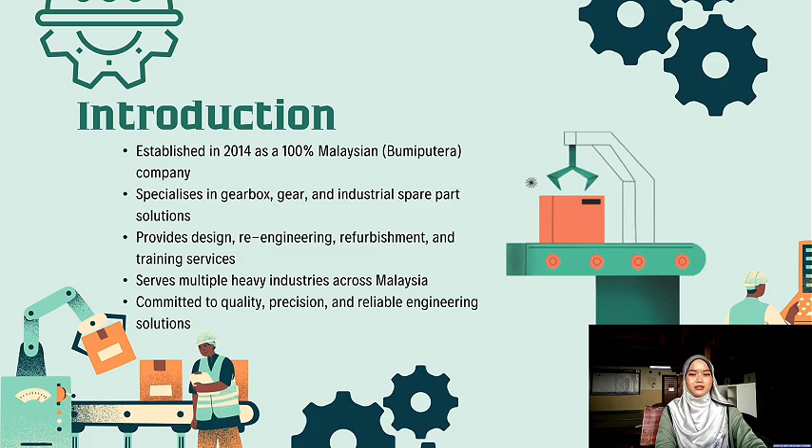Crescent Gear Solutions Sdn Bhd was established in 2014 as a 100% Malaysian Bumiputera-owned private limited company. The company specializes in the manufacturing and servicing of gearboxes, gears, and industrial spare parts. In addition, it provides design, re-engineering, refurbishment, and training services. Crescent Gear Solutions serves various heavy industries across Malaysia and is committed to delivering precise, high quality, and reliable engineering solutions guided by its philosophy of research, precise, and quality.

Company background: Crescent Gear Solutions Sdn Bhd is a private limited company that was incorporated on the 26th of May 2014. It is a 100% Malaysian, Bumiputera-owned company and is registered with the Ministry of Finance. The company operates from Klang, Selangor, where both its office and factory are located under one roof.

The core business of Crescent Gear Solutions focuses on the manufacturing and servicing of gearboxes, gears, and industrial spare parts for various industrial sectors. The company specializes in gearbox and gear manufacturing, re-engineering of gear systems, refurbishment and overhaul of industrial gearboxes, spare parts fabrication, and training in gear technology and maintenance.

The company is supported by strong engineering capabilities, including in-house research and development, licensed 3D design software, vibration analysis, precision measurement, and advanced gear manufacturing facilities. These capabilities enable Crescent Gear Solutions to deliver precise and high-quality engineering solutions.

Crescent Gear Solutions serves a wide range of industries such as power generation, cement and mining, oil and gas, ports and maritime, steel mills, water treatment, palm oil mills, and fertilizer industries.

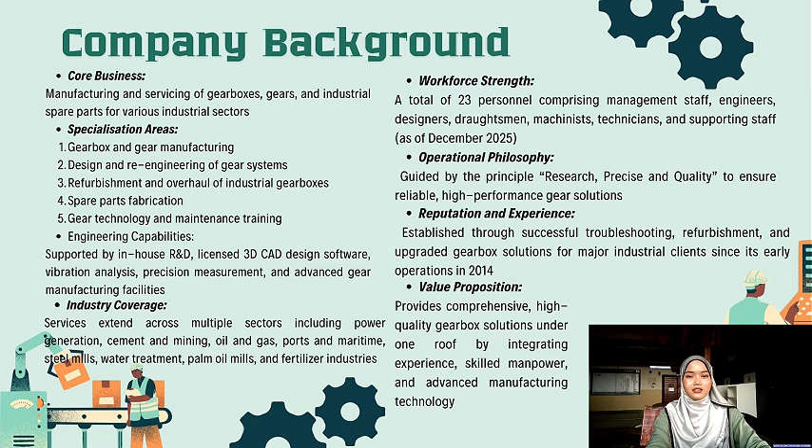At this stage, customer requirements are analyzed by the engineer. The engineer performs gear analysis to determine the safety factor and expected lifetime of the component. Then a 3D CAD model is created, or an existing design is re-engineered to meet the requirements and specifications for the gear.

The next step is material preparation. Suitable raw material is selected based on strength and application. The material is then cut into the required size and undergoes an initial inspection to ensure there are no defects before machining. For the material, they use aluminium 6061.

For the next process, they come to the machining process. Operations such as turning and milling are carried out to form the basic shape. More specialized processes like gear hobbing, shaping, and CNC bevel cutting are used to produce accurate gear teeth and complex geometry.

After machining is complete, the next process is finishing. For the finishing, grinding processes including gear grinding, cylindrical grinding, and surface grinding are performed to achieve high precision, tight tolerance, and a smooth surface finish of the gear.

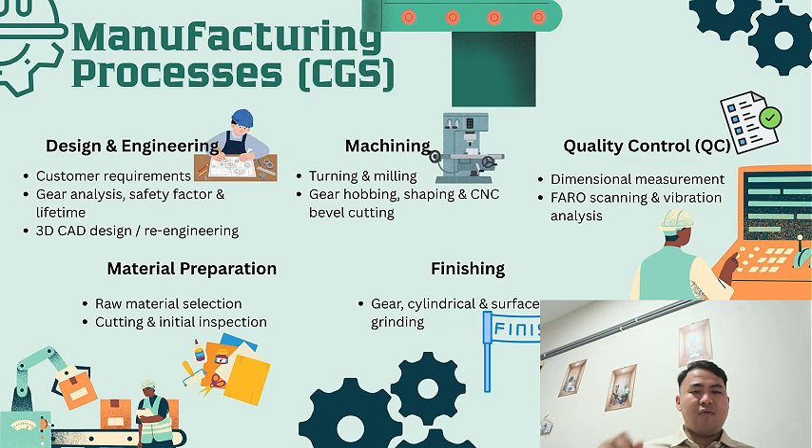That is the manufacturing process that the gear undergoes before it is sold to our customer. Next, I will talk about the production steps for the company CGS.

For step one, they will do production planning. Job scheduling and resource allocation are arranged to ensure machine, manpower, and material are used efficiently.

The second step is component preparation. All individual parts such as the gears, shaft, and housing are prepared and made ready for assembly. The material, such as aluminum 6061, is already prepared for the gear being produced.

Step number three is assembly. During this stage, the gear and the shaft are assembled together. Bearings and the planetary system are installed, followed by proper lubrication and precise alignment to ensure smooth operation of the gear.

Step number four is testing. An in-house no-load test is performed to check the running condition of the gear; noise and vibration are measured to detect any imbalance or defect. The final step is delivery and support.

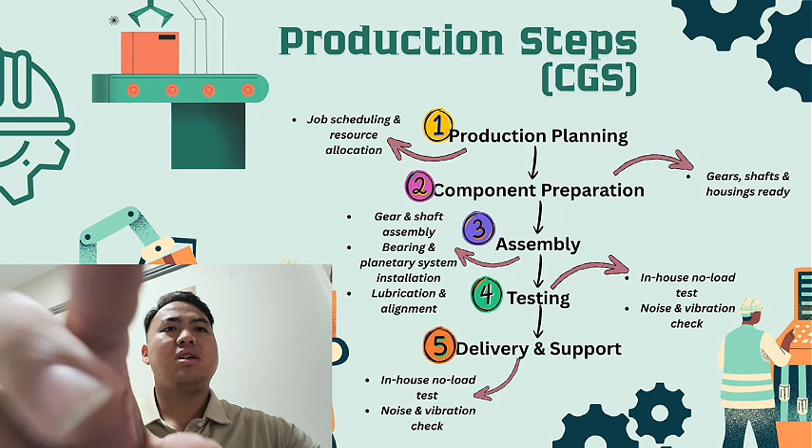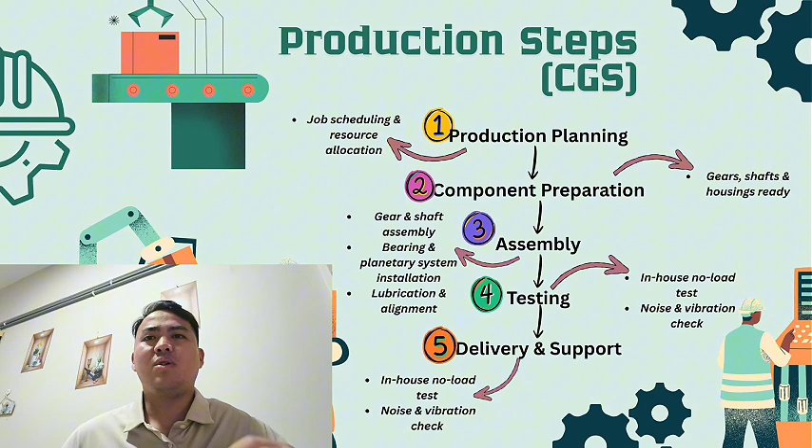That's all for my explanation about manufacturing process and step production. Thank you. Now I will move to the design concept and quality assurance practice. This company has four main design concepts. The first one is precision, where the design they manufacture will have accurate gear size and profile, meaning the tooth profile and dimension of the gear, manufactured with lower tolerance to make it more accurate.

The second one is reliability, to ensure a long lifetime for the gear. Instead of the gear only having 2 or 3 years lifetime, they make it last longer with minor maintenance.

The third one is safety. The design will have a higher safety factor, so the R&D or engineering department should choose the material based on the function of the gear. They do research to ensure the safety factor is based on the customer's needs.

The fourth one is customization. The design is based on customer need. As we know, there are different types of customers, so depending on the customer type, they have different designs and different functions for the gear. Based on their machining and their capability, they can make the design based on customer customization.

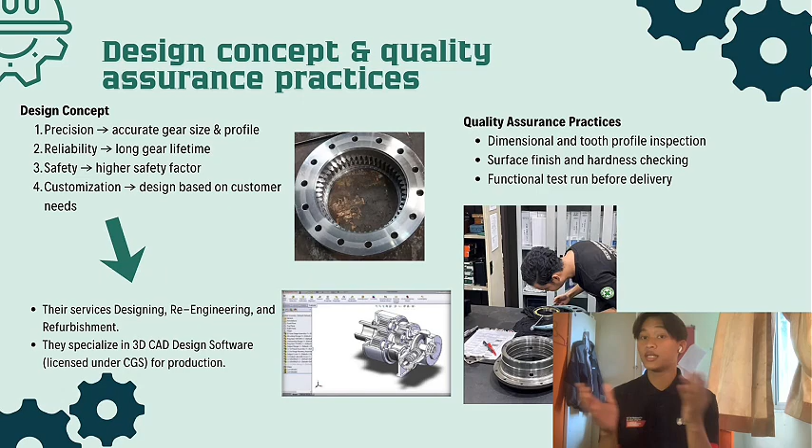As we see in the picture, the employee right now is measuring the gear dimension, outer dimension, to ensure the tolerance and dimension is still within specification before delivery to the customer. So next, we will move to the products manufactured in this company.

They have four: gear pinion, gear helical, gear pin, and gear spiral. These are a few of the products manufactured in this company. They have more, but I mentioned these four because the gear is based on the company, and these four are commonly manufactured.

The products manufactured are not made from nothing to become this gear, but they get the raw material from suppliers and manufacture it to be like this using their machining tools and devices.

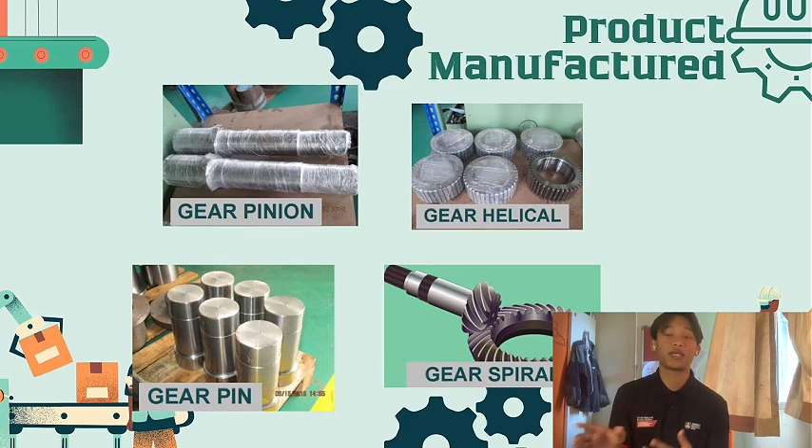So this CGS company has very talented employees and high quality machinery tools to provide the gear that the customer needs.

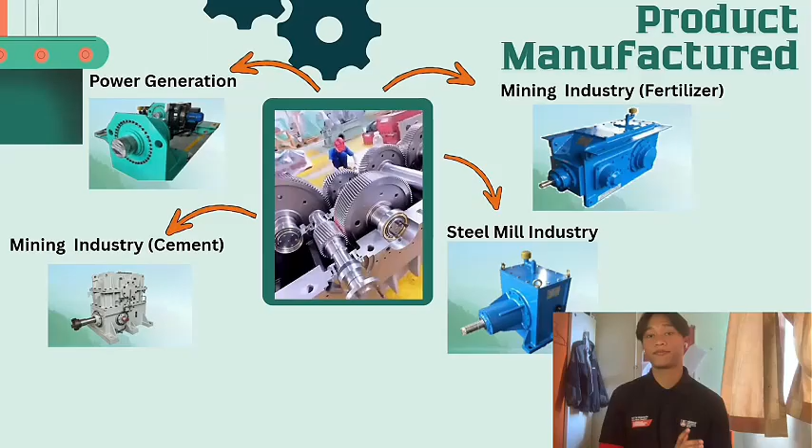Thank you, Raja. Next, I am Narjanatul Amira binti Muhammad Zawadi, and I will present about the problems and challenges that we observed during the industrial visit. First, product defect. During our industrial visit, we observed that one of the main challenges in gear manufacturing is product defect.

Some gears show inconsistency in tooth profile after the gear hobbing process, while surface burn and micro cracks were found after gear grinding. These defects are mainly caused by tool wear, manual machine setup, and limited in-process inspections.

As a result, the gear may produce noise during operations and have a shortened service life, leading to increased rework and production costs. Another issue is machine downtime.

Production is often interrupted during hob replacement, grinding wheel dressing, and machine alignment. This happens because most of the machines are conventional and require manual adjustment. Next, production efficiency suffers as long setup times are required when changing gear size or specifications, and repeated inspections are needed between each process. The gear grinding stage often becomes a bottleneck because of the strict tolerance requirement.

Safety is also a major concern in the manufacturing process. Operators are exposed to rotating machine parts, sharp cutting tools, and grinding sparks. If not properly controlled, this can increase the risk of workplace accidents and injuries.

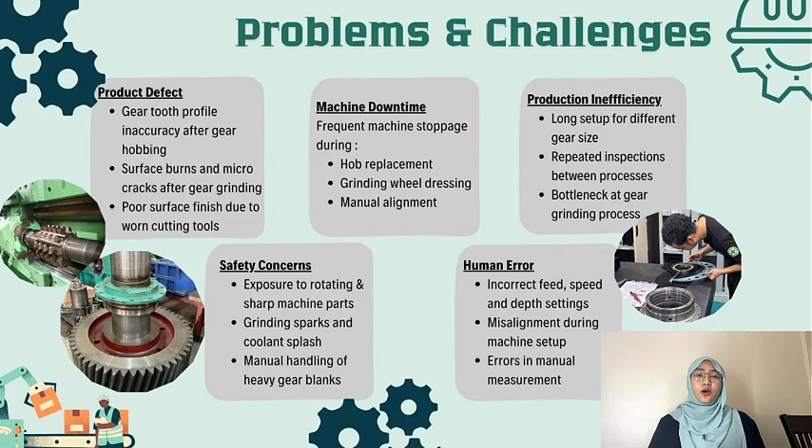The last one is human error. Incorrect machine setting, misalignment during setup, and error in manual measurement can affect product quality. Since conventional machines rely heavily on operator skill and experience, inconsistency in workmanship can occur.

Next, I'm going to present discussion and analysis. Suggestion for improvement is manufacturing technology. To improve manufacturing accuracy and consistency, the company can upgrade selected conventional machines to CNC lathe and CNC milling machine. CNC gear hobbing can also be introduced to produce more accurate and consistent gear tooth profile.

Next, process improvements can be achieved by standardizing machine setup procedures and implementing in-process inspection at critical stages of production. Our discussion now turns to comparison with other manufacturing technologies.

When compared to advanced manufacturing technology, conventional machines rely heavily on operator skill and require longer setup time. Advanced CNC and automated systems provide higher dimensional accuracy and shorter setup time. Therefore, adopting advanced manufacturing technology can significantly improve productivity and process reliability.

Next is the recommendation to reduce product defects. The company can implement statistical process control to monitor manufacturing variations. Advanced inspection tools such as coordinate measuring machines or laser scanning can improve inspection accuracy. Regular monitoring can also help maintain consistent product quality.

Production efficiency can be improved by applying preventive maintenance planning to reduce machine breakdown. Batch scheduling for similar gear types can help reduce setup time.

Next, workplace safety can be enhanced by installing additional machine guards and safety sensors on critical equipment. Proper use of personal protective equipment, especially during grinding operations, should be strictly enforced. The use of cranes, trolleys, and lifting aids can also reduce manual handling risk and improve operator safety.

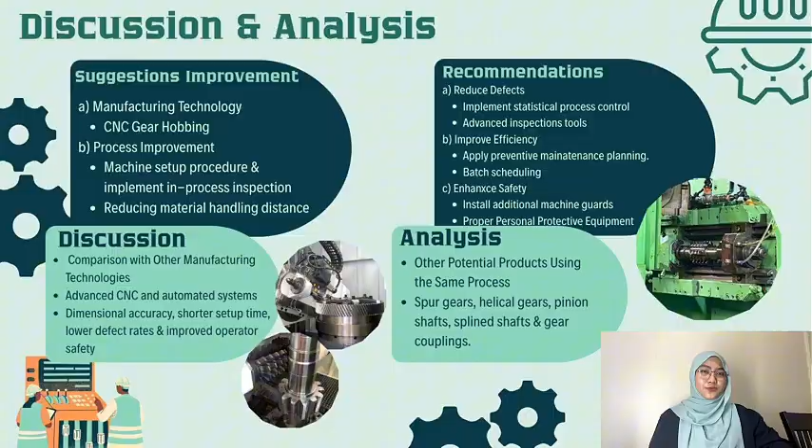Moving to continuous quality improvement, or CQI, which we observed during our visit to Crescent Gear Solution. First, looking at improvement to process or product, we believe CGS could benefit from IoT integration, adding sensors to machines like the gear hobbing and grinding equipment to monitor performance in real time.

They could also introduce an automated inspection system using AI vision to work alongside their FARO scanner for faster defect detection. And moving from paper-based instructions to digital work guides on tablets could really reduce error during assembly.

Next, problems faced and possible solutions. We noticed long setup time for small production batches. This could be improved with quick change tooling and fixtures. They still use manual quality records, which could be digitalized using barcode tracking to prevent mistakes.

Also, heat management during grinding is a challenge. Adding better coolant systems and thermal sensors could help. And there's a skill gap with operating advanced CNC gear machines, so developing an in-house VR training module could upskill their team faster.

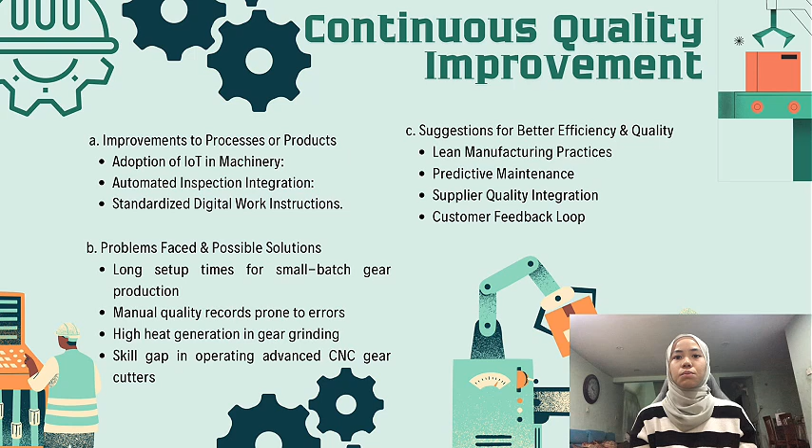Finally, suggestions for better efficiency and quality. We recommend lean manufacturing practices like 5S to organize the workspace. They could use predictive maintenance based on vibration data from their test rigs, and creating a structured customer feedback loop would help them improve design based on real world use. So these improvements align well with modern manufacturing technology trends, especially data-driven and connected systems.

So in conclusion, the visit provided valuable real-world insight into manufacturing technology. We saw a range of CNC and conventional machines from Taiwan, Japan, Germany, and the USA in operation, from gear hobbing and shaping to grinding and dynamic balancing. We also observed assembly process testing, procedures, and quality control systems that are critical in gear manufacturing.

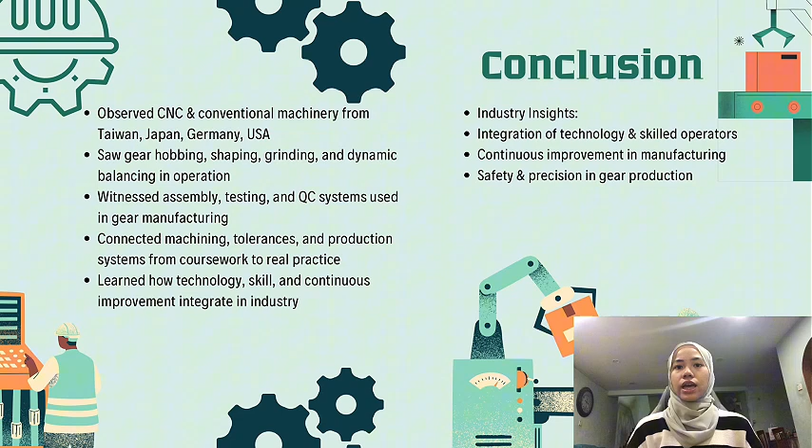This experience helped us connect our coursework in machining, tolerance, and production systems with industry practice. We thank Crescent Gear Solution for demonstrating how technology, skills, and continuous improvement come together in a manufacturing environment.